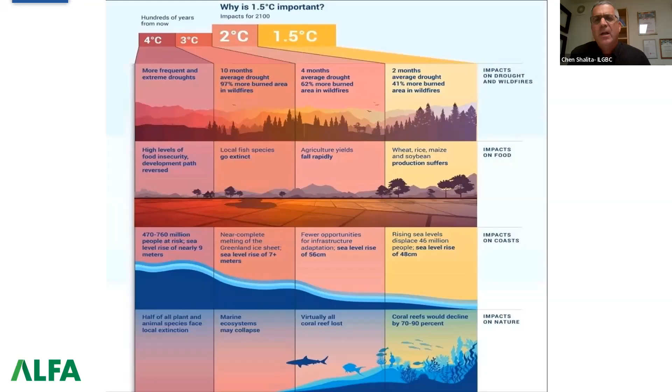The global aim is to limit temperature rise to no more than 1.5 Celsius. We have to remember why this is so important, because the difference between 1.5 Celsius and 2 degrees is dramatic in terms of impacts on the nature around us. Therefore, it is essential that we stay within the 1.5 framework.

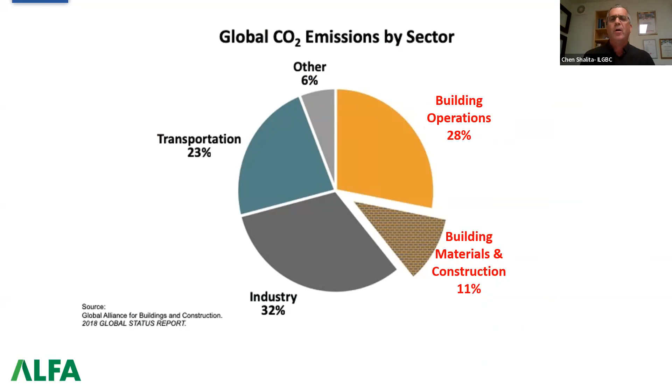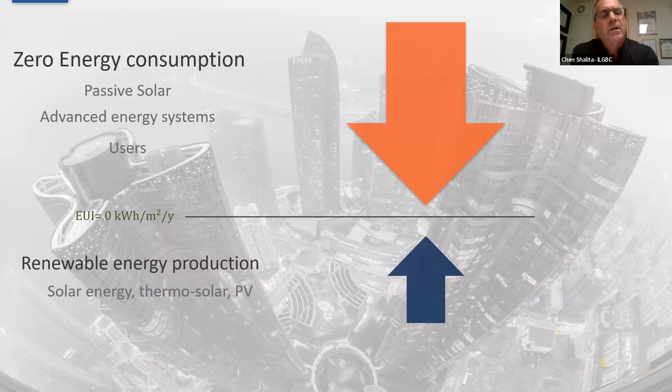As we know, most of the emissions come from building operations and materials, almost 40%. That means buildings will have to be zero carbon for us to meet that 1.5 degrees Celsius limit. And when we're looking at zero energy, we're looking at buildings which, on an annual average, consume as much as they produce, so the annual average is zero.

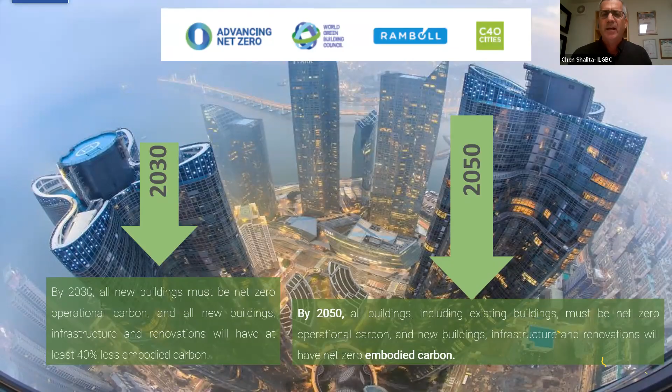So these goals have to be met: by 2030, all new buildings will have to be zero energy and 40% less embodied carbon. And by 2050, the challenge is much, much greater, to take all existing buildings and limit them to zero embodied carbon. So is this possible in the current market we're facing?

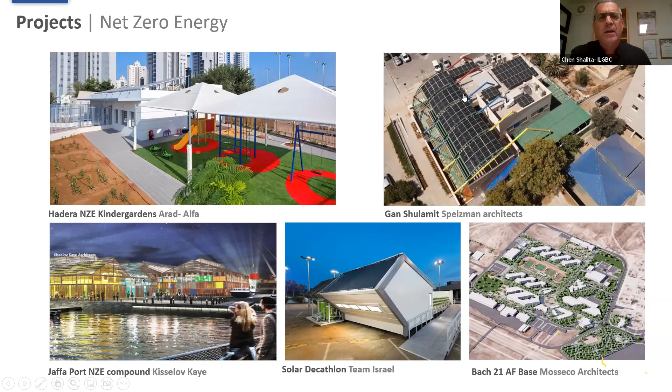We have some new projects, the first projects in Israel that achieved zero energy. So I'll briefly show them.

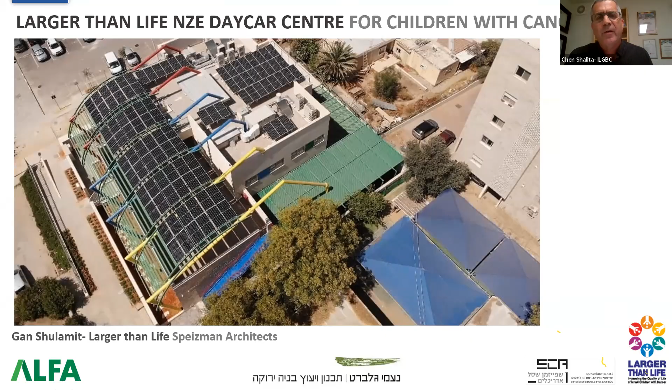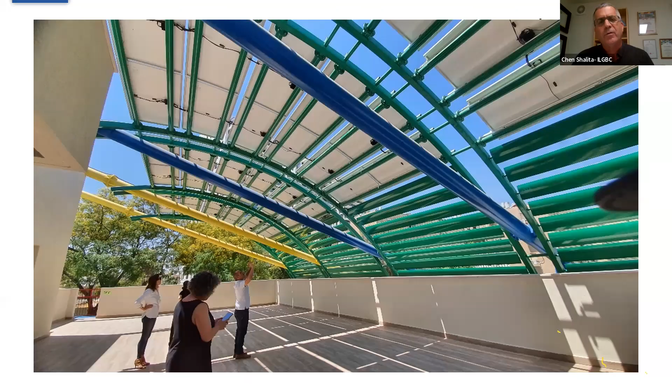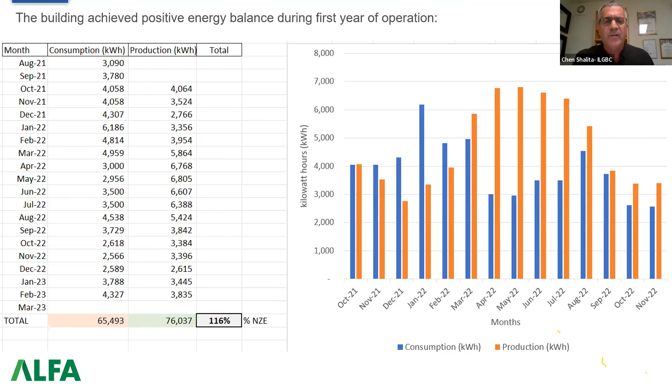The first project is a small kindergarten in Be'er Sheva, done by us together with Nomi Gelbert, who I saw here in the meeting, and with a very talented group of professionals and architects, Larger Than Life. The project was designed according to passive solar design, and some of the shadings on the building are also solar photovoltaic. We can now see, after a year, that the project, which was designed to be net positive, is actually functioning very well. In addition to the fact that it's a very healthy environment for the children who occupy it, children with cancer, it's also positive in its energy balance.

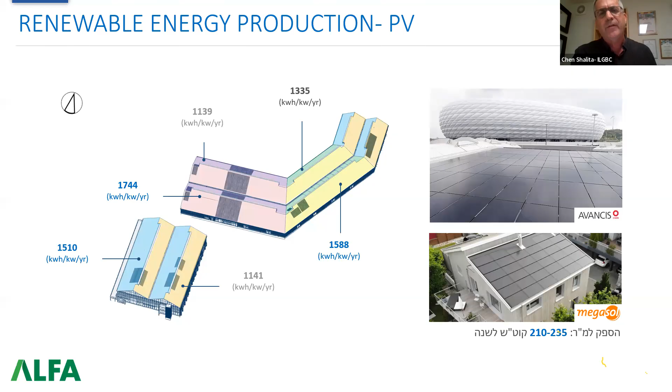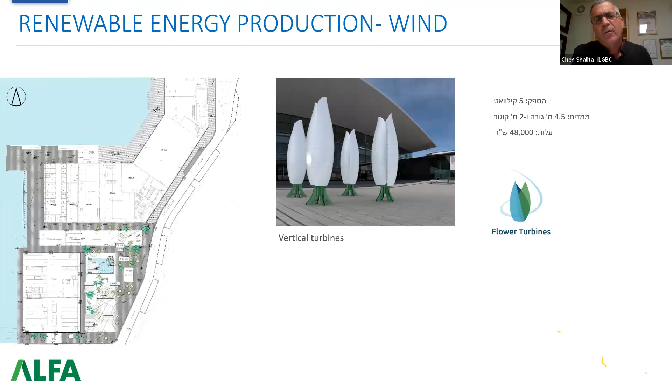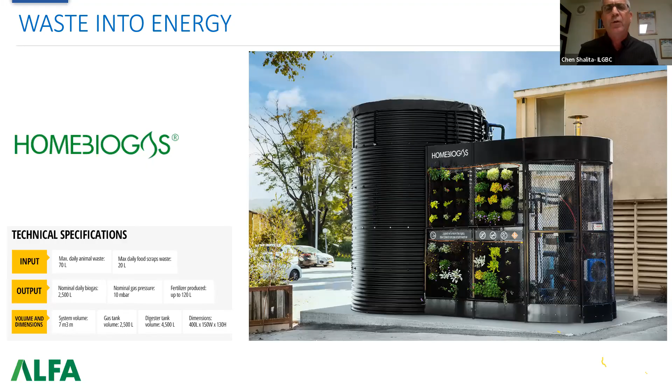The next project is Jaffa Port, done with Atarim. The whole compound is a renovation of existing infrastructure built in the 1930s, so it's very important to restore the actual look of the buildings. We did an analysis to see the potential of the roofs to produce electricity, and with a number of technologies, including wind, which is integrated now into the design, we are going ahead also with an innovative system which produces energy from the waves in the harbor of the project. Also, with the restaurants that will be on site, they will turn waste into energy through biogas. So this is also part of the renewable energy sources that will be on the project.

And in total, this project is now ending construction, and we hope that next year it will be occupied. We assume that in the beginning of the project, the energy balance will be no less than 65% net zero. We probably won't reach 100% in the first year, but there will be additions to the renewable energy, and therefore we hope that in the next few years we'll be able to balance the energy consumption of the whole compound to 100%, which would be an accomplishment.

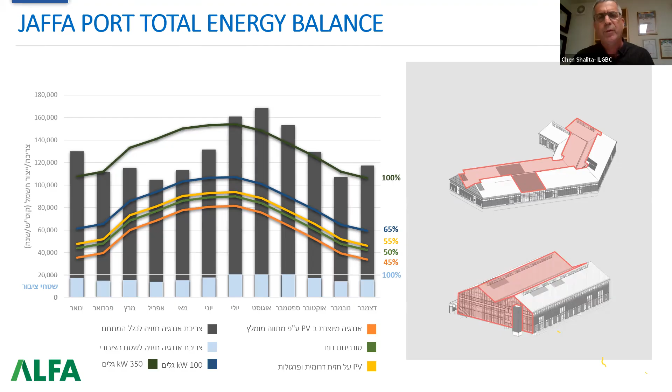The last project I wanted to show is this simple building in Givatayim. It's an existing building that belongs to Amot, a developer in Israel. And we did here with Amot an analysis to see the potential to produce renewable energy from the entire facade of the building, including the roof and the walls.

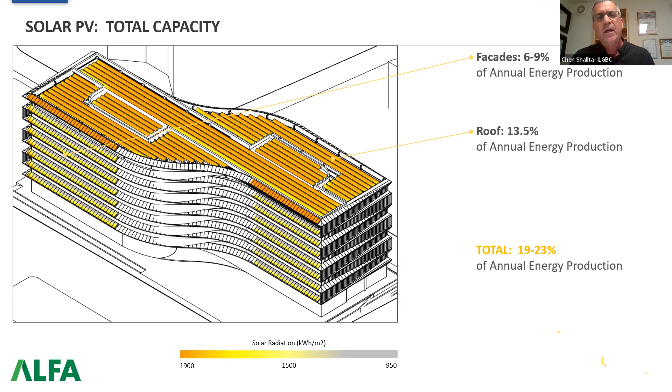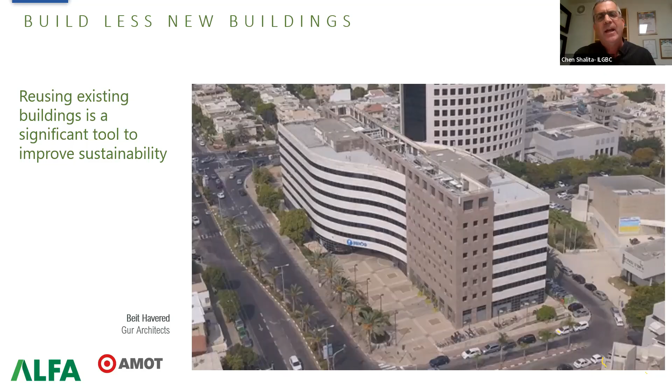The question here, and I think that's the topic, is the use of existing buildings instead of tearing them down, to renovate them. And here we had a chance, Amot had a chance to renovate the entire building, because there was a single tenant that went out from this building, and therefore the renovation was deep, and it turned into a much more technological and sustainable project, which is now being submitted to LEED Platinum. I think the best part about this project is that the building reuses 100% of its structure and envelope. There was no waste that went away from this building at all.

Again, to look at ways to reduce embodied carbon, there is a massive opportunity to use existing buildings instead of building new with new materials, new concrete. I think that will be probably the building's best contribution. In addition to that, the south facade is a photovoltaic facade, which also produces a very nice quantity of renewable energy.

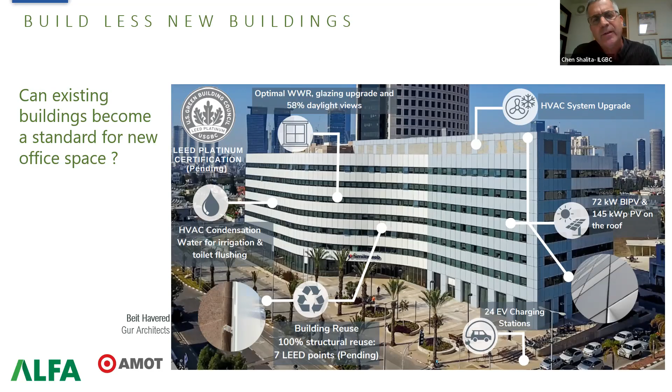Yeah, sure. As I said, every challenge has an opportunity. So if you look at the lower left side, you can see here where my mouse is. On the left is the marble that was on the facade of this building. And we added - Alcon is the company that did this - an aluminum construction. So they added the facade, and this is a prefabricated facade that has insulation in it. So actually, you're right, the existing building had no insulation at all. And by adding this external cladding, we were able to really enhance the insulation of the building to today's standards.

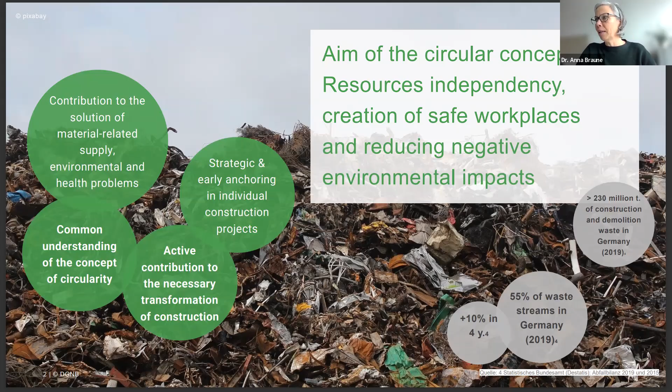And we want to generate more and better workplaces here in Germany as well. And last but not least, of course, it reduces negative environmental impacts. In my thinking, the circular concept is really like a motor for more sustainability. So the effects of building circular are social, economic, and environmental.

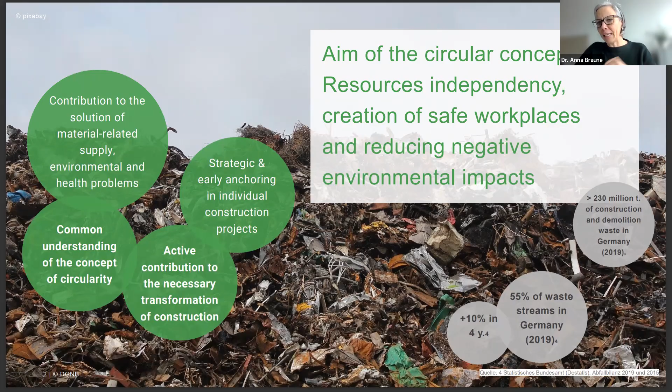What we did is not just define a circular building, but we defined what actors would have to do. Actors of a circular real estate and construction sector take into account that the building stock is a valuable source. The last example we saw is about generating the knowledge that existing buildings are valuable, so that you can do something about it, and that all materials used to build these buildings cannot just be thrown away. The future and next building will be better and more sustainable, but the existing building stock is really high value.

It can be a storage of materials as well, and existing material flows contribute to the circular economy today, which is very important. So the use of recycled materials and the reuse of materials is very important to do today. And last but not least, of course, it's important to build in a way that future generations can make use of the buildings once they are demolished or reconstructed.

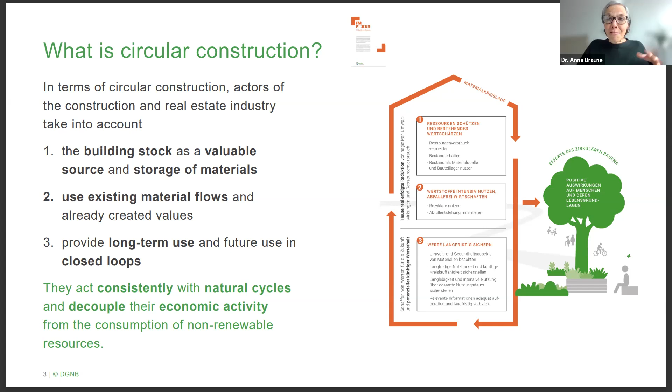Our document on circular building also contains a hands-on checklist - sorry, it's in German - and we're providing planners with knowledge of what it means. If I want to be part of the circular construction movement, what can I do? We generated a one-pager. Use this checklist whenever you think about a building, whenever you talk with your client about circularity, so there are impulses that people can use.

We didn't just cover the big topics, but really specific ideas that we want to plant into their heads, so that it's part of every discussion whenever you start renovating a building or thinking of a new building or whatsoever. This checklist is a very good instrument, I would say, and it's not the end of the knowledge, but just the beginning - to plant it into the heads, because then we can change things with our hands.

And then we have, of course, our certification scheme. DGNB has its own certification scheme, and here's an example of a few of our certified buildings. Within the scheme, in 2018, we had a new release. The next release will be next month - version 23 is due in April.

But the last one we generated in 2018, we defined a core topic that was circular economy at that time. So in 2018, we said we're redoing our certification. Circular economy, circular construction is a core topic - one of the 6 core topics that we had during the revision of our own certification scheme.

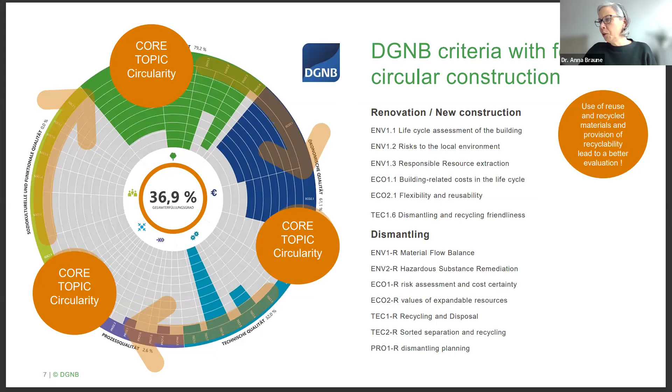Additionally, we have in the meantime developed a new certificate on dismantling, or a deconstruction certificate. It contains a few criteria, and with this certificate, which is now on the market since 2 years, we have identified the points where we say, if you do a deconstruction, how could you do this very sustainably? This certificate is very well received on the market, and nobody has done this before, and people are very thankful.

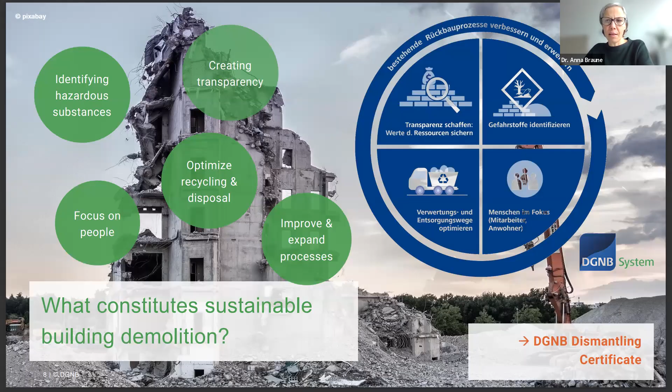And then the last instrument, which is quite new, is the Building Resources Passport.

In Germany, we have a still new government, and when they started 1.5 years ago, they said there will be a digital building passport that we are developing. And since we had quite an idea how that should look like, we developed one and proposed it also to the government. I think they need a little bit more time than our organization.

This passport is like an equivalent to an energy passport, but it's a material passport. So with this passport, it's really 1 page. I know it's really a dense page, so maybe we should put it on 2 pages, but anyways, it's a document that provides transparency on the materials. Where do they come from? Are they already reused or recycled?

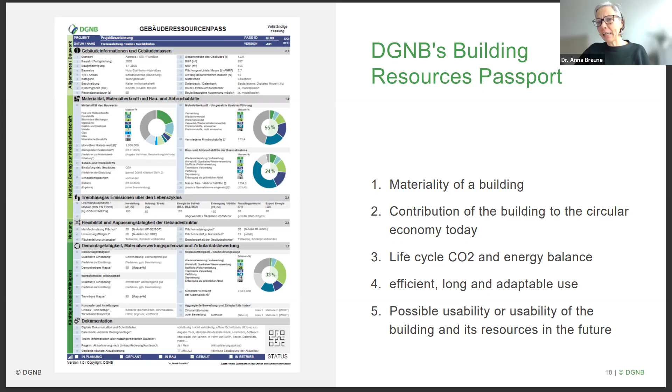Then what can you do with the materials perspective? Is there something you can do with this in the future, and how is the documentation, what is the climate impact of the materials. So this passport is an instrument for transparency, and we have some tools already that implement this passport and provide it, so planners can use it and provide it to their clients.

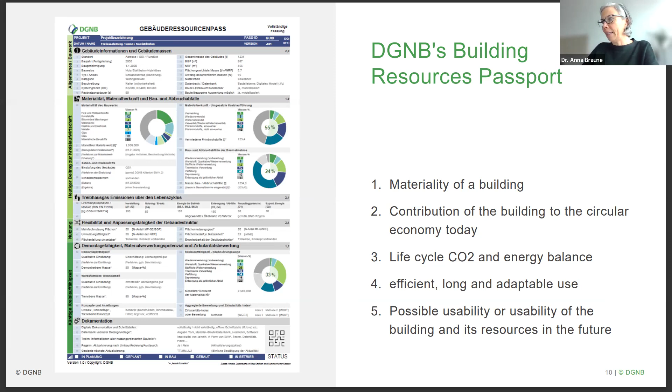And last slide, what we are doing in Germany is we have, from a European perspective, a lot of impulses, because Europe wants to become a circular continent. And this means that there's instruments like the Level(s) framework, which is a European framework for how to talk about sustainability of buildings. So we use this framework to also make everything right from a European perspective.

We have the EU taxonomy on green and not green money. There's a circular economy taxonomy that is proposed. There's a circular economy action plan that we also look at. And in Germany, of course, there's a lot of norms and standards, but there's a big movement to make them more circular. And with this, I know it's a little bit theoretical, but maybe you can use some of the input as what instruments and ways you can go as an organization to drive the market towards more circular construction.

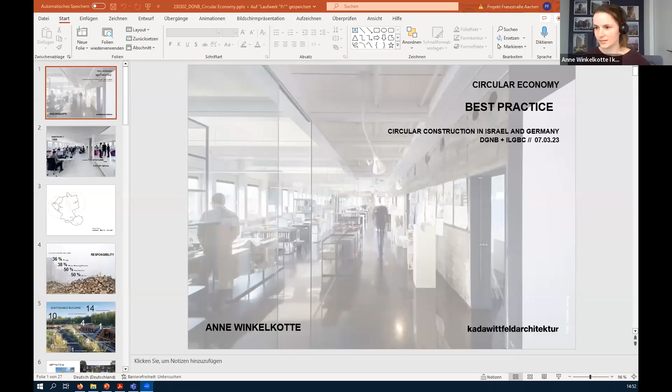I will give you now a small overview of a circular project. I'm Anne Winkelkotte, I work at kadawittfeldarchitektur for 3 years now. I'm a sustainability consultant here, and I've studied architecture and sustainable building. We are an architectural office, established in 1999. We now have more than 180 employees from 25 different nations. Our headquarters is located in Aachen, but we also have a small office in Berlin with 50 employees and a small one in Munich, and we were founded in Austria in Graz.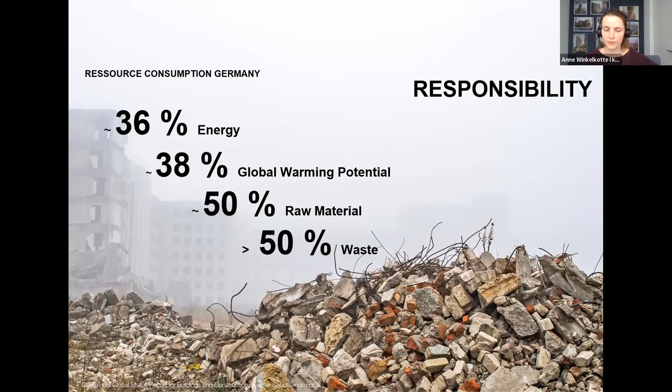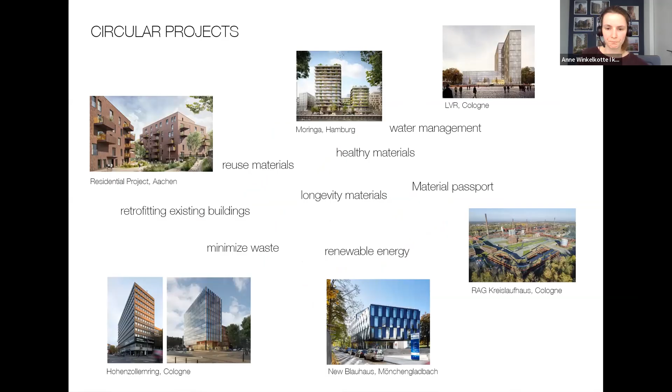For example, our Moringa project, the LVR, or the RAG building - they have a material passport. They also have healthy materials. All of the projects you see have renewable energy, but for example the new Blauhaus also has a photovoltaic system in the facade. We also have a building where we can use the existing building structure, the Hohenzollernring. And in our residential project in Aachen and the Moringa project, we also use reused materials and have the water management system.

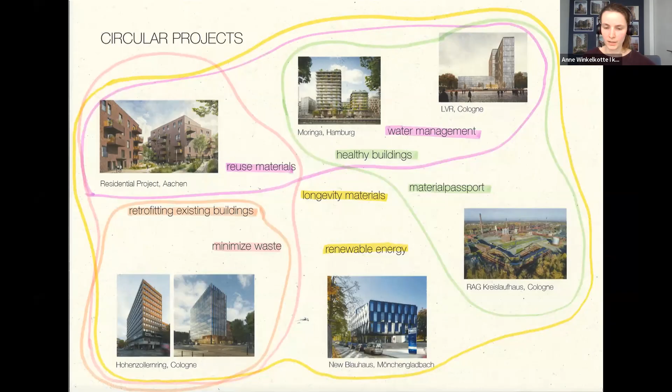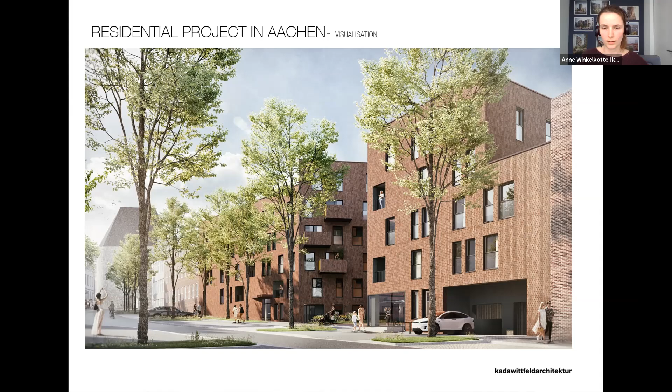I will now introduce you to the residential project in Aachen. Here our focus topics are water management and reused materials in the facade. The project has 108 residential units, of which 30% are social housing. The project is located in Aachen, really near to our office - it's just down the street.

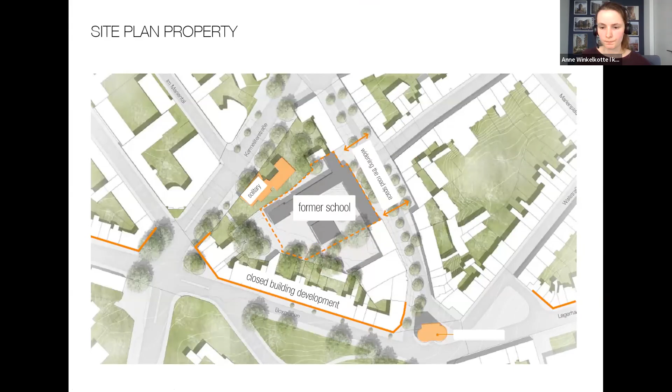So yeah, first our design approach. We wanted to open up this big block and create an urban path network through the inner block. We wanted to give pedestrians the space of the city back, and also create a city of short distances.

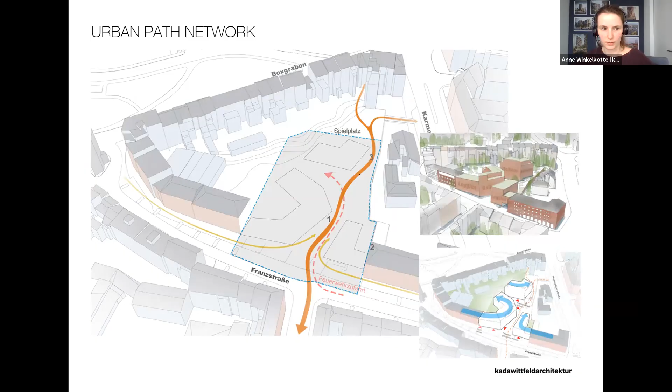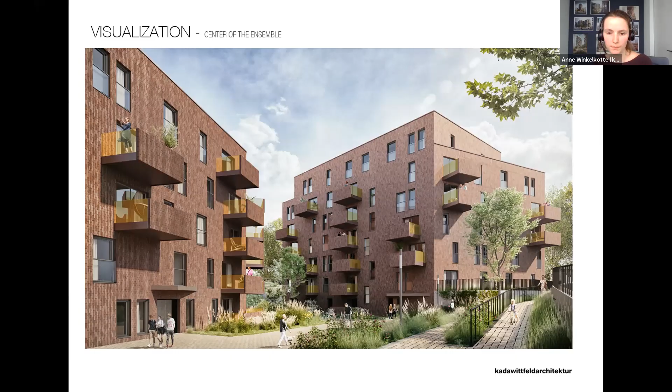Here you see again a visualization from the center of the buildings. You can see that we also have a lot of greenery inside. We really wanted to create a green space, and you can see this also in the site plan. There are a lot of green spaces because green spaces create a retreat in the city.

And with this greenery, we can also sink 100% of the rainwater naturally. This isn't only ecologically interesting, but also economically interesting because our client can save the cost for the sewage.

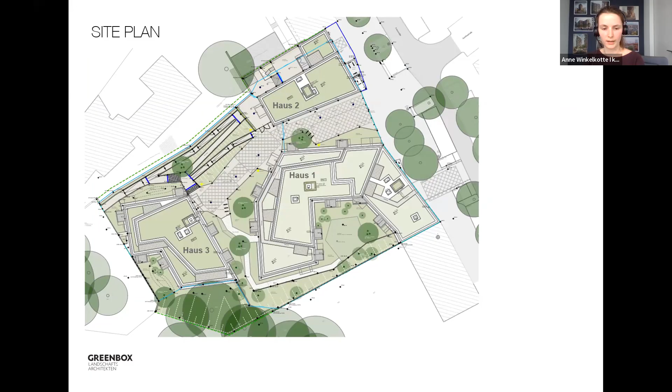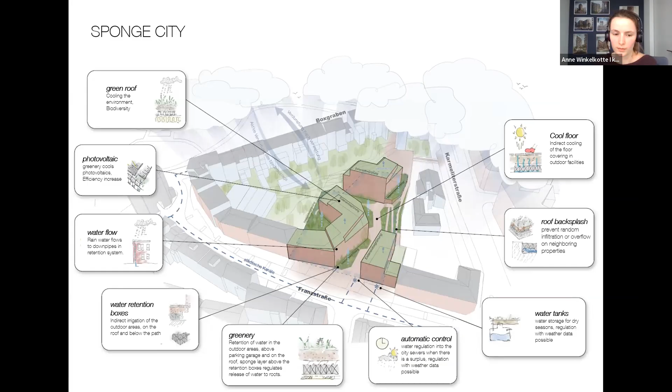So yeah, here again some of our elements of the sponge city. We have green roofs, and we have water retention boxes underneath the paths. We have a lot of greenery in the ensemble, and we also have water tanks where we can store water for dry seasons for irrigation of the plants. These water retention boxes also create a cool floor because they're underneath the path.

Here are again some elements: we can combine a photovoltaic system with a green roof. And the greenery creates a nice microclimate and is also good for biodiversity in the city.

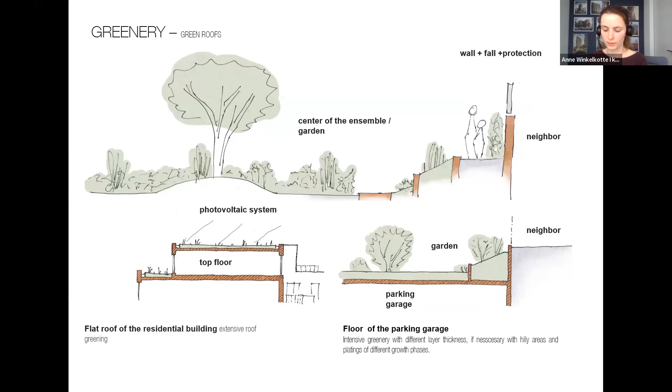So the next slides are about our facade idea. When we design facades, we always first analyze the neighborhood. In these neighborhoods you see a lot of brick buildings, so we decided to use bricks here too.

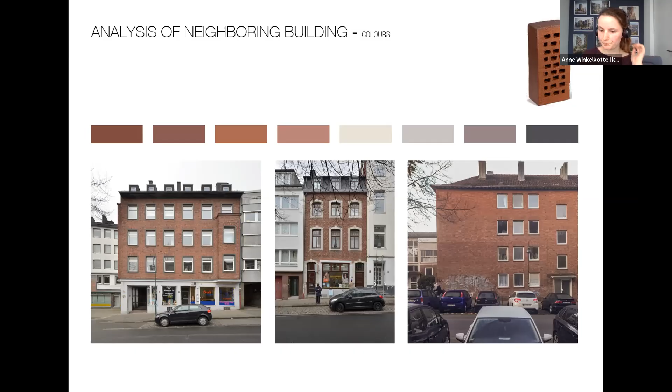In the competition we planned with full or whole bricks. But then in the further planning process, our client wanted smaller facing strips instead of full bricks because they are cheaper, give more space inside the building, allow a thinner wall, and save CO2 since they're smaller. But now we have a composite thermal insulation system, and this isn't demountable.

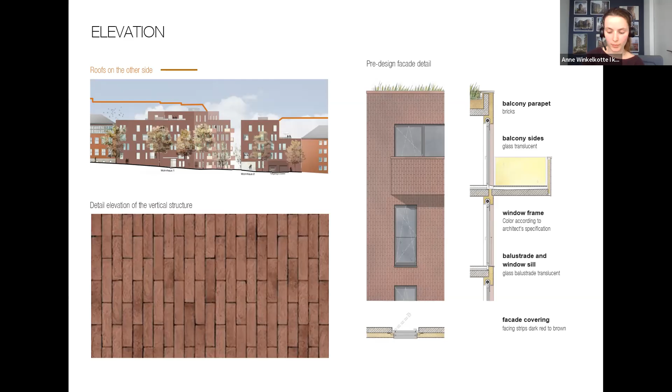But then there was a turning point in our project, because one of our colleagues had the great idea to reuse the bricks from the old building for our new building. We all thought, wow, that's a great idea, but we didn't know how to do it. Then we did research and found the startup Concular.

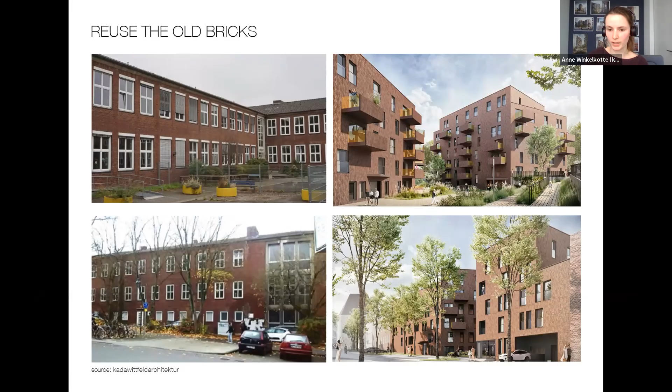This is also the startup with an online shop for reused material. Together with them we did a first attempt and tried to save the stones with manpower. The result was that it's possible to save the stones and cut them into facing strips, but it's too expensive, so it's not economical. And the client said, sorry, that's too expensive for me.

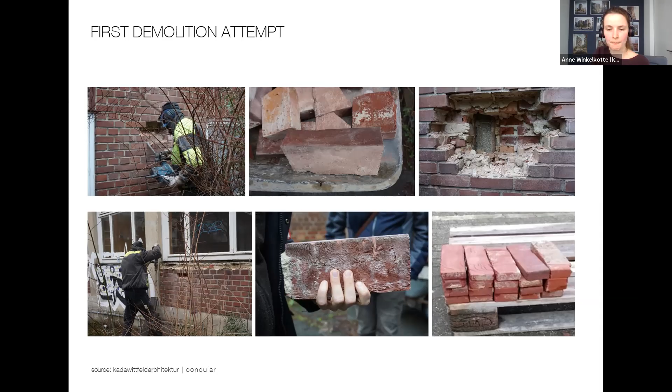Then nothing happened in the project for a year. We were really lucky that our client changed, and the new client really liked the idea of reusing the bricks. He did his own research and found another company called Klinker Historika, and they told us we can make it economical if we just demolish the building the normal way.

So we did this, and they also gave the demolition contractor a little bit of money so he'd care more about the stones. The second step was the on-site preparation, where we separate the stones from the mortar. Then we had the whole bricks and cut them into facing strips. We use not only the outside of the two cuts but also the inside, as you'll see on the next slide, and hopefully someday we will reuse them in our new facade.

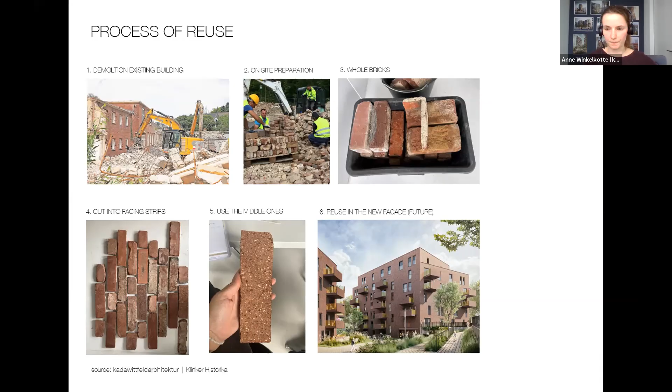Another cool thing Klinker Historika told us is that we can really use everything of the bricks. We can use solid bricks—normally you cut those into two facing strips, but we decided we can cut them into more strips, and on the inside we have these nice sprinkles. We can also use broken bricks cut into smaller facing strips, and we can use all the rest, the broken pieces, for the substrate for the greenery on the roof and also for our outdoor facilities.

By reusing these bricks, we can save 95% of CO2. The new facing strips will also be tested by an independent institute, so we will receive a building approval, because we need one in Germany.

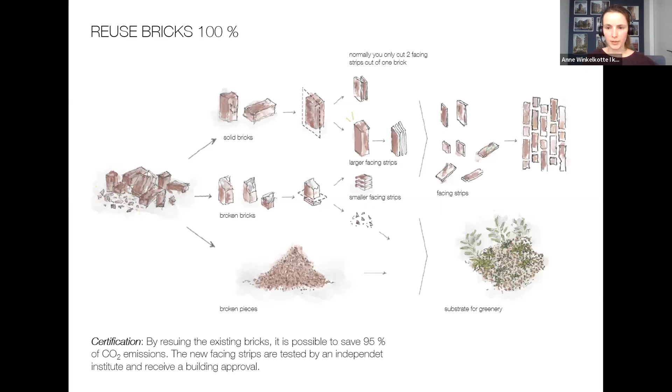One last example here: before the idea of reusing the bricks, we had gravel in the outdoor facilities. Now we can also change this and use the broken pieces from the reused bricks instead.

What we've learned is that the process of reused materials isn't standardized yet, so for us it was really hard. This is also the reason why we, together with Concular and other partners, developed a new norm for this. We are really thankful for our good network, because we think without this network it wasn't, or isn't, possible to do something like this.

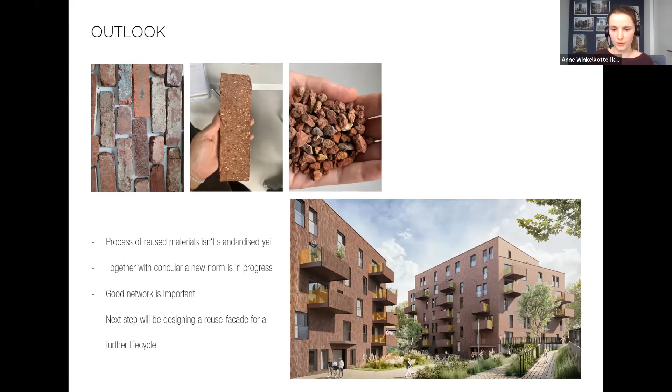For us, the next step is to design a facade with reused materials, which you can also give a further life cycle, because at the moment it is part of this composite thermal insulation system, and it's hard to give it a third life cycle. Thank you very much.

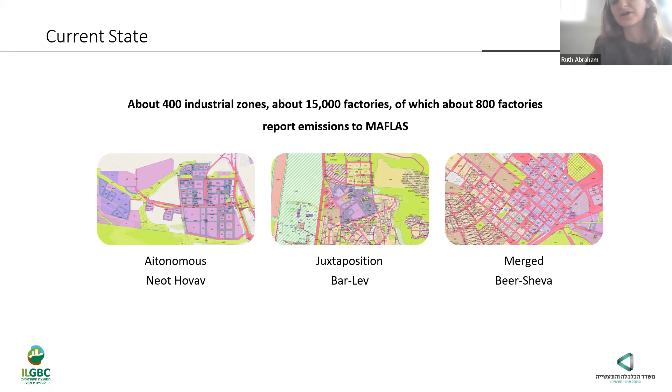In order to plan a factory, we have the whole Israeli planning system. It starts with a master plan for the industrial park. Usually the master plans for industrial parks enable us to get building permits out of it, and then a business license.

We have several policy papers, data, and planning guides that were published in Israel in the past few years. Among them are guidelines for planning industrial parks that talk about a safe area for polluting factories. We see it right here in the red rectangle, and then it enables us to build a little bit more sensitive uses quite far from it.

We also took a look at the data collected by the Statistical Agency of Israel regarding environmental issues in the industry. We have regulation and environmental acts, some voluntary, some mandatory. Among the voluntary tools are many tools of the Ministry of Industry and Economy, including the Industrial Symbiosis Project and the Israel Resource Efficiency Center, which reach out to factories and encourage them to make their waste into someone else's raw material.

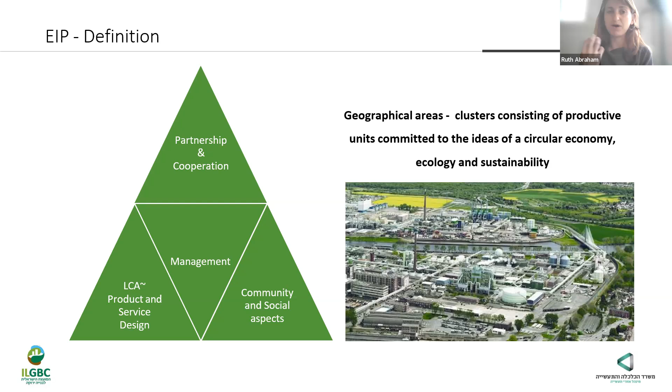We took a look at EIPs around the world. I think the most interesting and famous EIP is the Kalundborg Eco-Industrial Park in Denmark, which is based on one factory bringing in another factory, which brings in another factory, and the basis for this partnership is economical. We can also see what is going on in North Italy, an area full of factories that make a lot of furniture and leather products, and how they changed their awareness towards sustainability and raw materials.

We also took a look at parks around the world. Among them is Höchst, which is next to Frankfurt. Höchst is a privately owned industrial zone, and the owner recognized the economic benefits of making the park a sustainable one. He built a joint and mutual infrastructure that passes raw materials from one factory to another, handling all the deals and the business, encouraging the factories to do business among themselves.

To get into the situation where we have minimum waste going to the landfill, I also want to draw attention to Kokkola Industrial Park, which is part of a network of eco-industrial parks in Finland. The basis for this network is knowledge transfer from one park to another, and how we embrace awareness towards sustainability in industry.

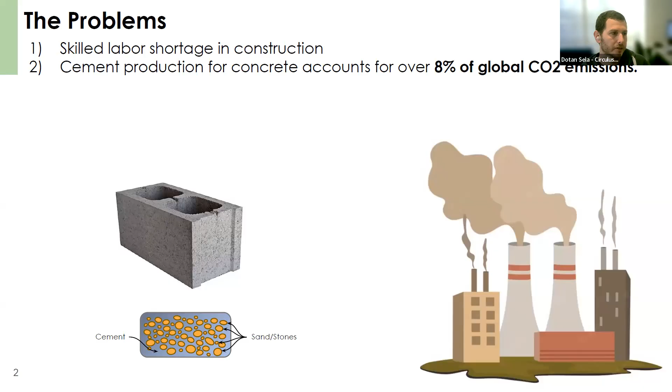So where we see an opportunity is in plastic waste. And why plastic? Plastic is already used extensively in the construction industry, but recycled plastic not so much. Why is that? Well, everybody loves to talk about plastic recycling, but nobody really likes to actually sort the different plastic types, and I think we saw that in the presentations here. Today we have a lot of garbage and it's very usable, but sorting it is very complex and not economical.

So the technology we've developed allows us to use the most commonly available recyclable plastics. We can mix them all together and melt them, and then mix them with aggregates and sand. This actually creates a kind of polymer concrete where we replace the cement with plastic. We still have the aggregates and the sand, but now we have plastic waste that glues everything together.

By reducing the need for sorting and processing, we can reduce the cost of plastic, because actually recycled plastic is very expensive compared to concrete. And it's a bit surprising, because a lot of the time we think of it as waste - what is the problem, it's waste, let's use it. But actually all this sorting and processing makes it very expensive and not very attractive to the construction industry.

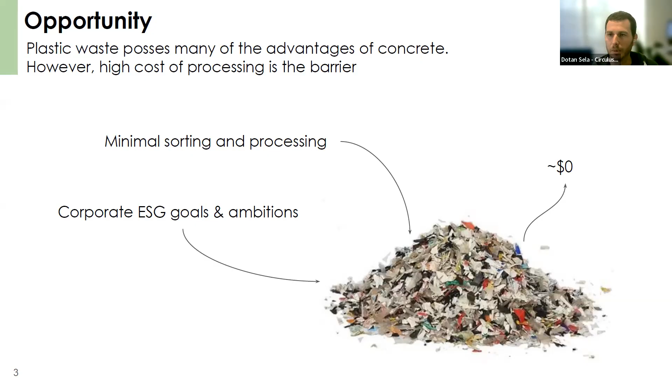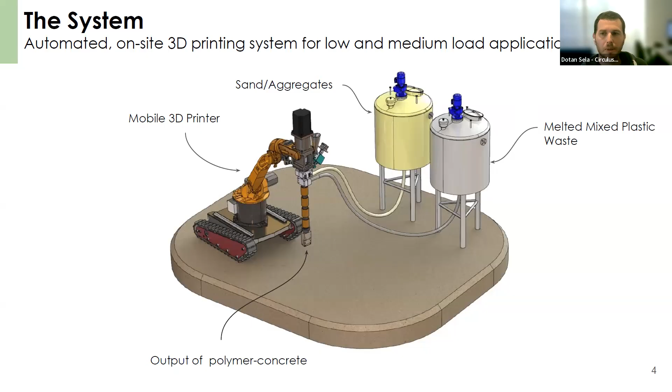So basically what our system does is it's an on-site automatic 3D printing system for low and medium load construction applications. I'll explain more about the application in the next slide, but basically the system receives melted mixed plastic waste, mixes it with sand and aggregates and other additives, and delivers it to a mobile platform that can move at the construction site or project site and deposit this polymer concrete wherever needed, and does it very fast.

Basically what the system does is it manufactures and installs the product at the same time. So you don't have to manufacture it at a plant and bring it to the site and then have a lot of people do a lot of processes to install it. It actually deposits the material on site, similar to concrete 3D printing if you're familiar with that, but with recycled polymers. So we have a lot of applications, and we can add additives per application.

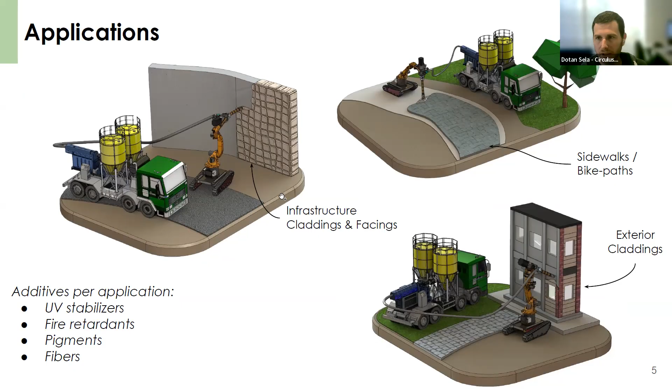For example, UV stabilizers for places where the sun is an issue, fire retardants where fire is an issue, pigment, fibers, and more. The technology behind this system is basically something that we've developed over the past year.

In the picture, you can see the POC printer that we've developed. I'm there just for scale. You can see it's pretty big, and it's actually a combination of plastic mass production and 3D printing, because we know how to produce a lot of plastics in a very short time, but we usually do it in very large equipment in factories. Then we have 3D printing, which can deposit material wherever needed, but it's usually very small.

And we combine these two principles to make a mobile 3D printer that can output very large quantities. It's currently compatible with most of the commonly available mixed plastics that we use for our foods, for single-use containers, beverages, whatever. It's most of the recyclable waste stream in Israel, and I'm sure in Germany as well. We're supported by the Israel Innovation Authority, and we filed a provisional patent for this technology.

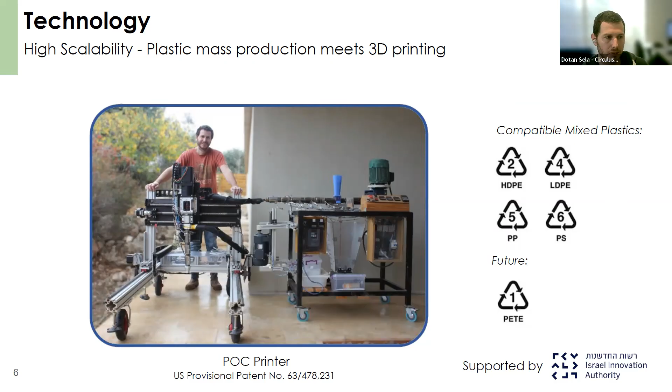This technology basically allows us to output large quantities of material in a short time. Usually when you think of 3D printing, you think of small, and it's very cool, but it's very small and slow, and it's for prototypes. With our POC printer, we've already achieved a lot faster printing, because if we want to compete with concrete in construction, we have to do simple stuff, but we have to do it fast and at a large scale.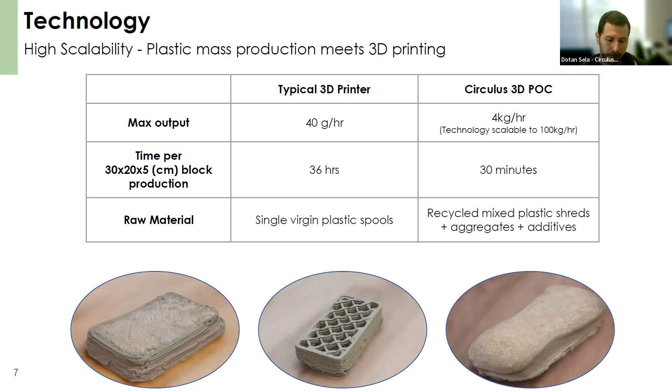So some of the advantages we offer: first, we talked a lot about costs in the webinar. A lot of times sustainable construction is costlier, more expensive than traditional construction. We can actually reduce the cost by reducing the need for labor. Labor is the main cost of a lot of construction projects, and this is something that continuously goes up. By doing stuff autonomously and doing on-site 3D printing, we can cut a lot of the costs, as well as with the cheaper raw material.

Regarding emissions, because we use waste, basically the only emissions from the process are from melting the plastics. To melt plastic, you need to take it to 200 to 250 degrees. To make cement, you have to heat everything to 1,500 degrees. So you can obviously see the big change here.

Plastic also has a lot of advantages for green construction. For example, the reduced urban heat island effect, because plastic weighs a lot less than concrete and stores a lot less heat. We can do stuff like stormwater runoff management - for example, in sidewalks we can incorporate drainage channels and absorption tanks, since it's 3D printing. If we talk about facades, we can incorporate improved thermal insulation.

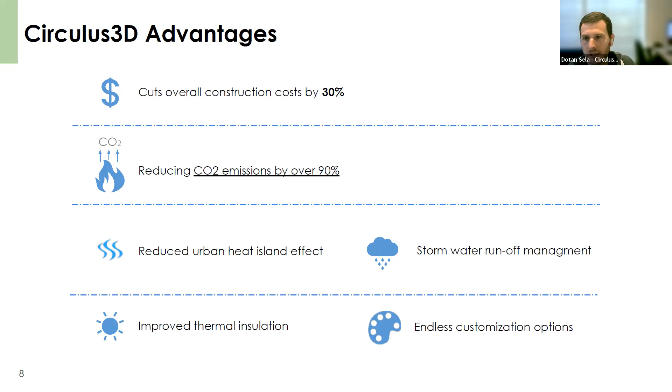Basically, right now we are looking for a go-to-market. We have identified cladding for infrastructure, for example acoustic walls, retaining walls in interchanges, highways, and inside cities as well, as a big enough market to start with. Low regulatory barrier is I think the main driver here, because we actually started with sidewalks, but a lot of regulations in sidewalks right now limit us a bit, since we need further development. For facades there's much less regulation, and we have a lot of advantages compared to traditional materials because we use recycled materials.

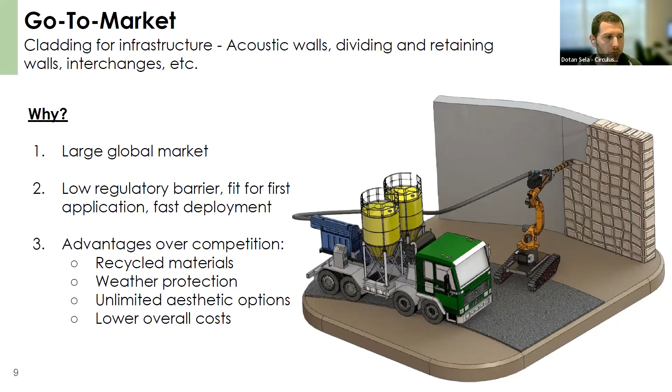Plastic is a great material for protection against the elements. Basically, plastic doesn't break down - that's the reason why it's so hard to get rid of it. We have unlimited aesthetic options because we can customize however we want, and overall costs are lower because we can save a lot on the costs of that material.

So a little bit about the team. I'm an experienced mechanical engineering manager. I've worked at several startups, and I've been developing 3D printers for the past 7 years, both as a job and as a hobby. I work with a team of experts and consultants.

Yair is doing the business development. Uzi is one of the biggest experts in Israel about plastic recycling. And I also work with construction consultants like Dror, who specialize in eco-friendly building materials.

Where we are now, we've basically completed the POC. We've achieved high volume printing, and we've shown that we can do a lot of textures, sizes, and mix the mixed plastic waste with aggregates. We validated the raw material at zero cost with several companies, and we are working on regulation and compliance.